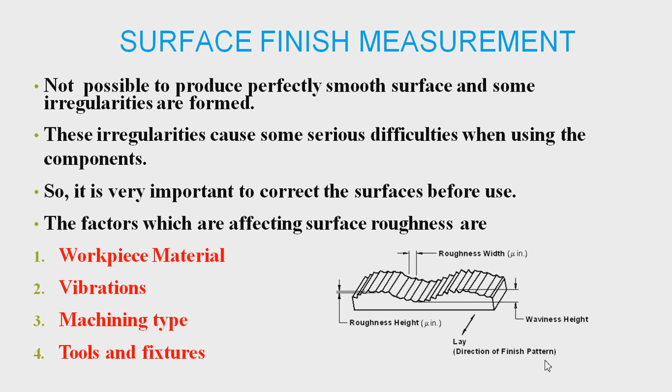And type of machining. If you are cutting and depth of cut is high, that is, if your coarse cut is there, then more roughness will be there. And if your tool and fixtures are not rigid and clamped tightly, in that case also surface roughness will be produced.

Now, type of surface finish. First of all, we should know what is surface. Surface of a body is its boundary which separates it from other body. Okay, there are two types of surfaces. First is nominal surface. Nominal surface is nothing but an ideal or perfect surface, which is theoretically geometrically perfect.

Then rough surface. These surfaces have numerous small peaks and valleys that deviate from the nominal surface. Means a surface or actual surface on which peaks and valleys are there is called a rough surface. Definitely these surfaces have a certain degree of roughness. Then wavy surface, as shown in the figure, third one, a surface of this type is called a wavy surface.

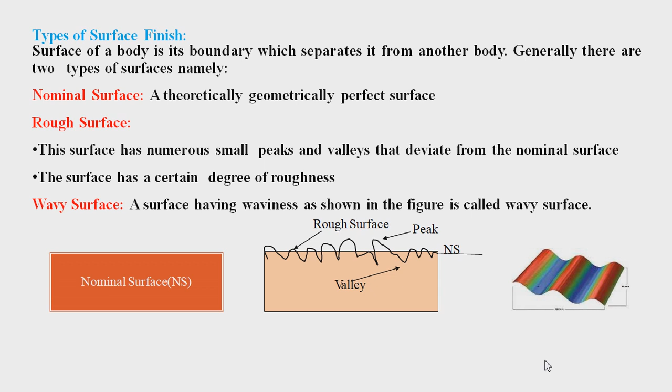Now, geometrical irregularities. Now we will discuss the causes of the roughnesses. The first is first order irregularities. These irregularities are caused due to lack of straightness of guideways in machines, like in lathe, shaper, milling. The guideways are not straight on which the tool is moving.

Then second order irregularities, these are caused by vibrations. Then third order irregularities, these are caused by machining, type of machining, whether coarse or fine. Then fourth order irregularities, these are caused by improper handling of machines and equipment.

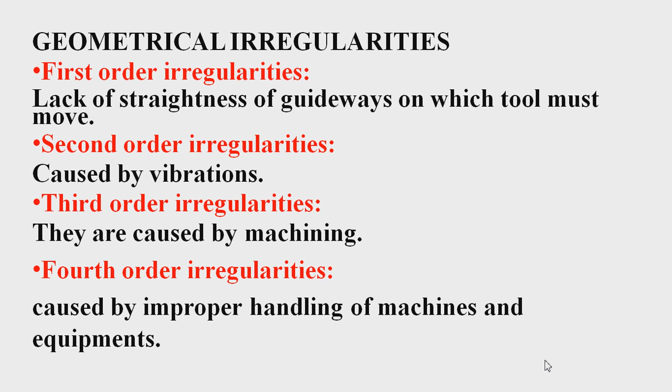Now, very important is elements of surface texture. A surface has many elements, like surface roughness. These are micro irregularities resulting from the action of production processes, as discussed before. And profile, it is the shape of any section through a surface. If we can see the shape, the cross section, then that will be its profile.

Then flaws. These are irregularities in a surface due to cracks, blowholes, scratches, etc. Unless otherwise specified, the effect of flaws should not be accounted for in the measurement of roughness. This is very important. Then surface sample or cutoff length. The particular length that is taken for sample measurement is called the cutoff length. It is also known as roughness width cutoff.

Lay. It is the direction of the predominant surface grooves that are produced by machining. And the final one is the waviness. Surface irregularities that are more widely spaced than roughness are called waviness. We can easily see all these elements on these diagrams. It's very clear.

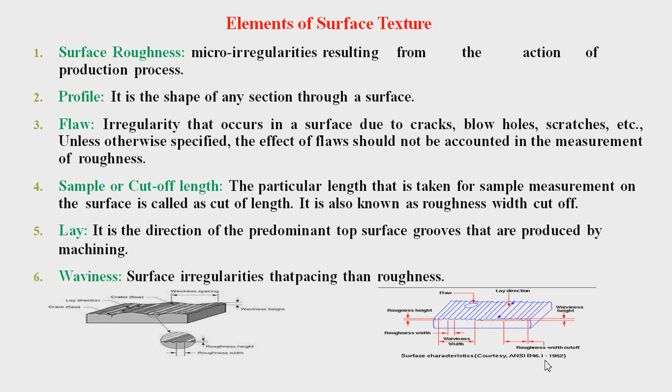Now, datum for surface finish measurement. For the quantitative measurement, we have to assume a reference or datum from which surface finish numerical values may be specified. There are two methods for that. One is M system, that is mean line system. In the mean line system, it is a line that is parallel to the general direction of the profile and is placed such that areas of the profile above and below the line are equal, as shown in the figure.

Then how is the mean line determined? Mean line is determined as follows. A straight line AA is drawn so that it is parallel to the general direction of the profile for a length L.

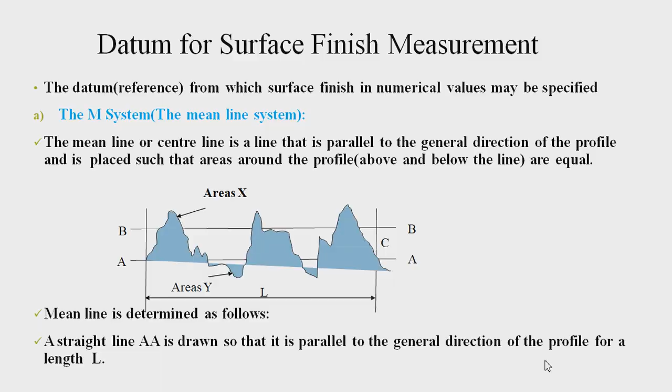Then area x and y are measured as shown in the figure. The mean line BB is a line at distance C from line AA, where C is calculated as summation of area x minus summation of area y divided by L. The line BB is parallel to AA. This is the first method by which we can easily get numerical values for the surface finish.

The second method is the E system, the envelope system. The envelope line is a line obtained by rolling a circle of radius r on the surface. This curve is the locus of the center of the circle. Once this curve is obtained, it is brought down vertically by a distance r. By doing so, the curve will rest on the crests of the surface.

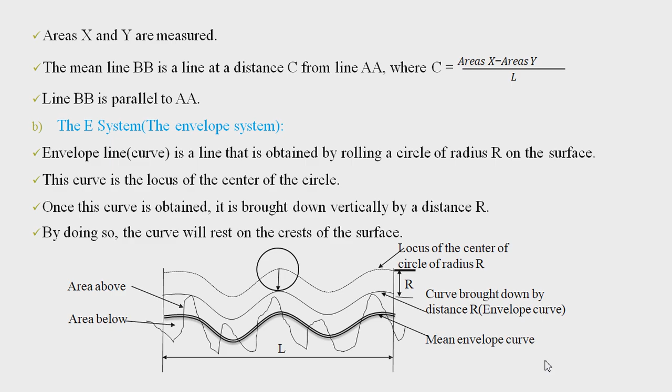Now the envelope curve is moved downward to a position so that the areas of the surface profile above and below are equal. This mean envelope curve becomes the mean line in the E system. Now we want to analyze the surface finish. The surface finish can be analyzed using three methods: the average roughness method, the peak to valley height method, and the form factor. It is form, not from, form factor.

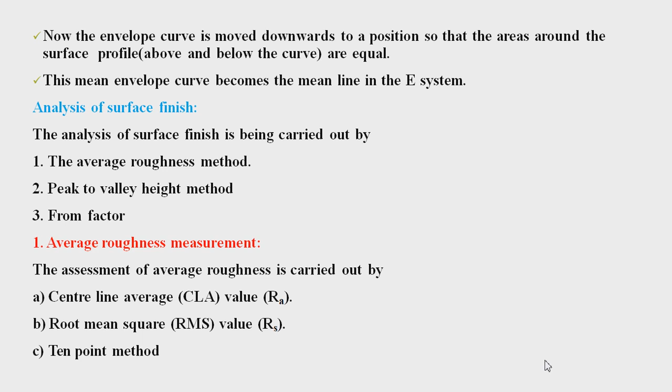The first one is average roughness measurement. In this method, the following values can be obtained: first, the centerline average value, RA; the root mean square, RMS value; then the 10-point method. First of all, the centerline average value. This value is the average height from the mean line of all ordinates of the surface, regardless of sign.

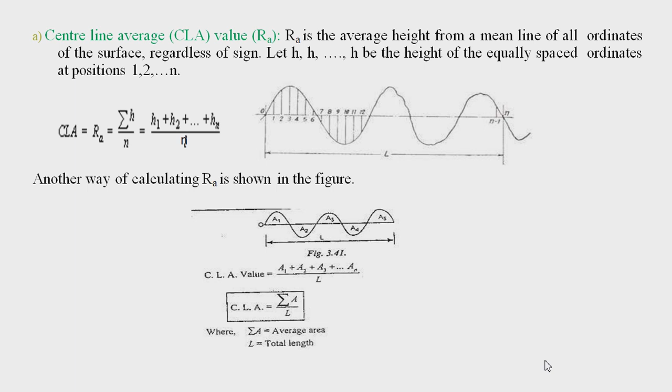Second is the root mean square value. It is the square root of the mean of the squares of the surface heights measured from the mean line, where H1, H2 are the heights of the equally spaced ordinate positions. We square all the ordinates, sum them and divide by n, and then take the root. This is the RMS value.

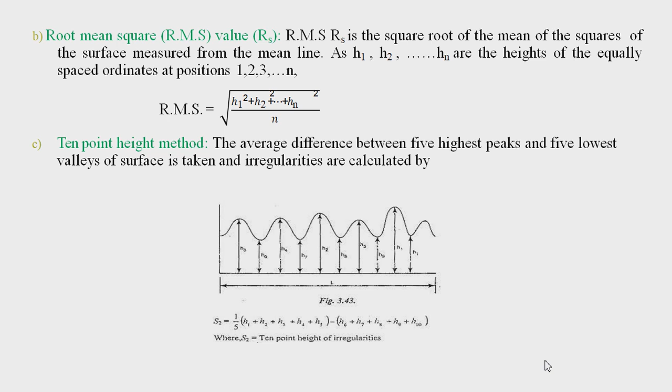And the 10-point height method. In this method, the average difference between the 5 highest peaks and 5 lowest valleys of the surface is taken, and irregularities are calculated using the following formula. All the 5 highest peaks will be added, then all the lowest valleys will be added, then the difference will be taken, and then the average of that will be taken. This is called the 10-point height method.

The next method is the peak to valley height method. It is the distance between the highest peak and the lowest valley for the considered sample length. L is the sample length. This is called the peak to valley height method, R max.

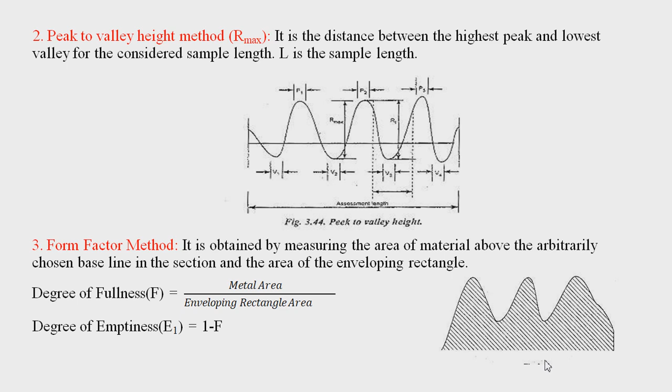The depth of smoothness is the distance between the mean line and another line parallel to it, drawn such that it touches the highest peak within the considered sampling length. Then the mean depth is the distance between the mean line and another line that is parallel to it.